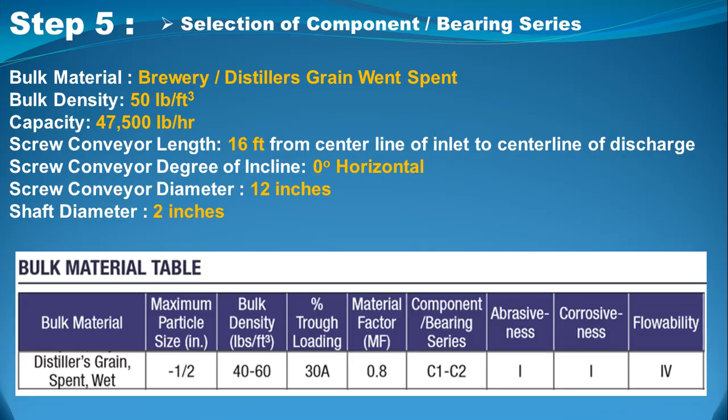Moving on to step 5.1, selection of component series: screw, trough, and cover. The recommended component series for brewery, distillers, grain, Went Spent is series C as listed in the bulk material table, because these materials are dense, abrasive, and sluggish when compared to series A and B bulk materials.

Series C belongs to the heavy duty construction category. This is to prevent excessive maintenance or downtime, and also consists of heavy duty screws, troughs, and covers. Sectional screws and formed flange troughs are recommended for series C bulk materials. You can see this on page 18 of the engineering guide.

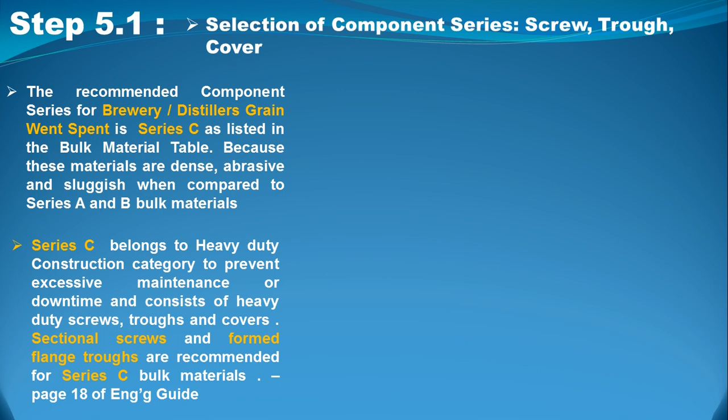Based on the type of bulk material, the type of series we select for the sectional screws and form troughs, flange troughs, is series C. Since we already have the screw diameter, which is 12 inches, the length of the screw conveyor is 16 feet. This design is constructed with carbon steel, as we considered in the second video on steps 3 and 4.

Based on the component series table, since we have the screw diameter of 12 inches and shaft diameter of 2 inches, the cover thickness is 14 gauge. For the series C type of screw conveyor, based on this, we have a sectional screw number, and the standard is 12S416. This is the code of the screw conveyor, sectional, since we considered sectional screw because the series of our design is series C.

The trough thickness minimum is 3/16 of an inch. As you can see on the highlighted red data, those are the data that are selected for this type of design of screw conveyor.

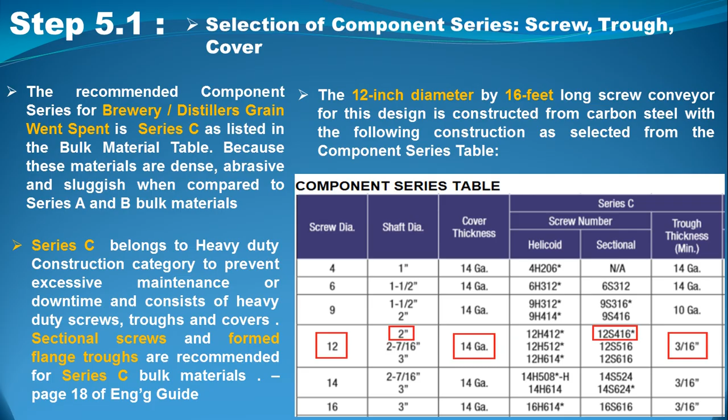Step 5.2 is the selection of component series, the screw. As we can see from the previous data, here is the sectional screw and flighting data, based on the series C that we consider.

Since we have already the screw diameter of 12 inch and the pitch is 12 inch, because we considered in the previous video, step 1 to step 3, standard pitch - the pitch diameter and the screw diameter are equal.

Based on this data, the standard pitch single flight screws have the outside diameter equal to the pitch, and the most common screw type used is for horizontal screw conveyors with inclines up to 10 degrees. Since our design needs a horizontal screw conveyor, the design is safe, and the considered standard pitch and diameter is safe.

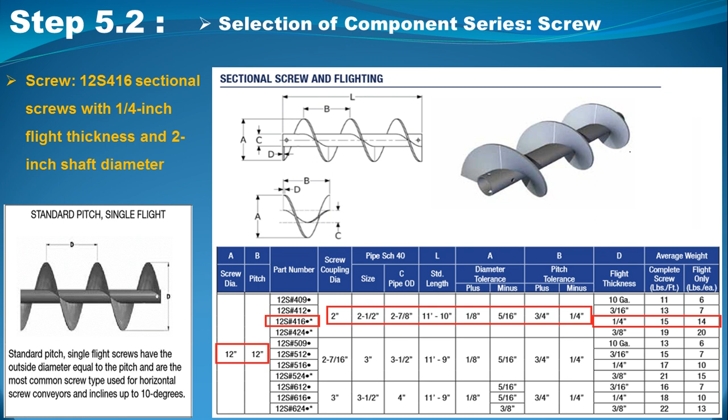Step 5.3 is selection of component series, Trough. Since the screw diameter is 12 inches, the trough thickness is 3/16, as in the previous slides. We have dimension A at 13 inches, dimension B at 7 3/4 inches, and dimension C based on the drawing at 2 inches.

So this design we consider is the U-Trough, the TUF 12316 formed flange trough with 3/16 inch trough thickness. The TUF 12316 is the standard, with a weight per foot in pounds of 29.

This part number is in this form. So when you design, fabricate, or purchase, you specify the part number, because during fabrication it uses the standard design and dimensions. This data will be considered, as you can see on the table.

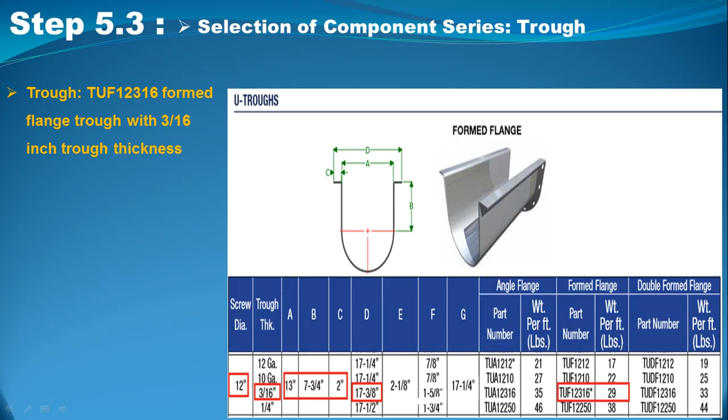So step 5.4, the selection of component series, the cover. Still same, based on the screw diameter, so 12 inches. As you remember previously, the thickness of the cover is 14 gauge. So this is the flange. For the cover, we consider the flange cover with 14 gauge thick cover thickness.

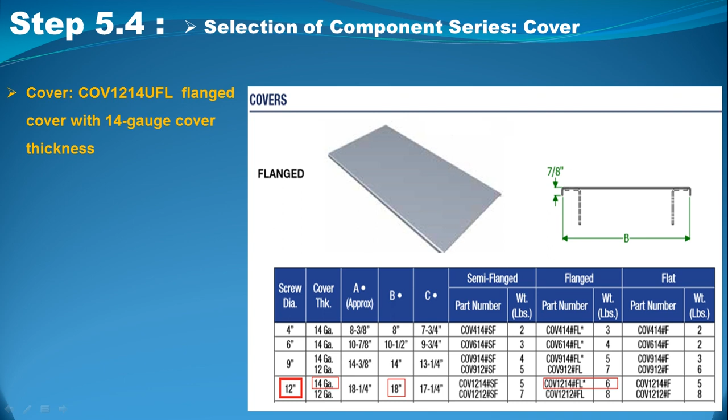The flange part number on this design is COV1214#FL flange cover. So this is the form. During the fabrication or design, or you may order the finished one, so you may specify the part number. But if you do the fabrication in-house, so based on the drawing and also on the dimensions, as you can see, these are highlighted with red color boxes.

Step 5.5 is the selection of hanger bearing series. The recommended bearing materials are 1 and 2 as listed in the bulk material table, which is C1 and C2. So the series component is C, and the bearing material series is 1 and 2. We already selected before, no? Based on the bearing material series 1, 2, the hanger bearings can be Nylatron, Plastech, UHMW, wood, Gatke, or ball bearing.

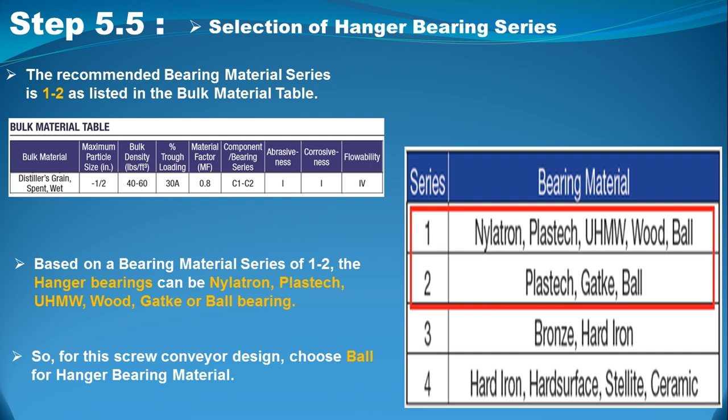So based on the previous video, we consider the ball bearing. Series 2, it's ball. So the bearing material is ball. For this screw conveyor design, we choose the ball for hanger bearing material.

Step 5.5, selection of hanger bearing series. Based on the shaft diameter of 2 inches, we get this standard bearing. As you can see on the drawing, A is the width or thickness, 1 and 15/16, almost 2 inches. And B is 3 and 1/4, 4 and 5/8 is C.

So C is the diameter, the outside diameter of the flange bearing, hanger bearing. So the part number is HGBB2. The considered hanger bearing series is the style B hanger bearing, selected and used for the U-Trough hanger or 670 U-Trough hanger. Since the trough of the screw conveyor is U-Trough, this is the type of bearing we consider.

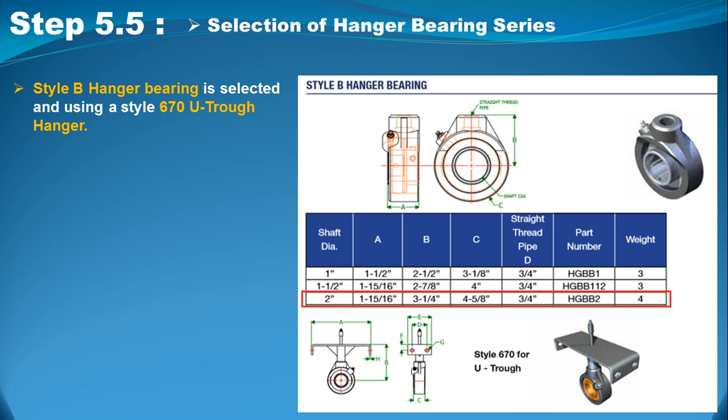Step 5.6 is the selection of drive-end bearing series. For this design, we consider the flange roller bearing, selected for the drive-end mounting of the screw conveyor. Flange roller bearings are mounted directly to standard trough ends on the drive end of the screw conveyor. Flange bearing housing also contains 2 sets of tapered bearings designed to withstand the thrust of the bulk material being conveyed.

Since the shaft diameter is 2 inches, based on the picture, this is the dimension of the flange bearing. So the standard part number is EBF2R. This is the part number of the flange roller bearing type.

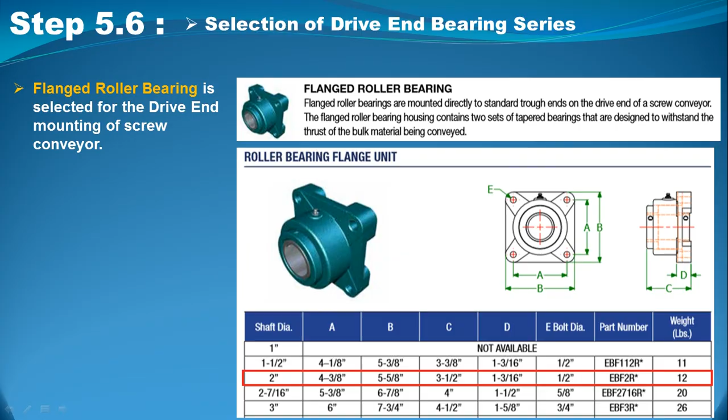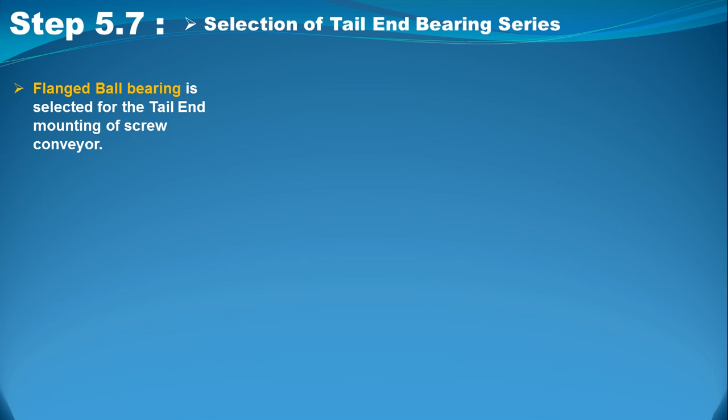Step 5.7 is the selection of tail-end bearing series. We choose the flange ball bearing as selected for the tail end mounting of the screw conveyor. Flange bearings are mounted directly to standard trough ends on the tail end of a screw conveyor. The ball bearing housing contains one set of ball bearings designed to withstand radial loads only.

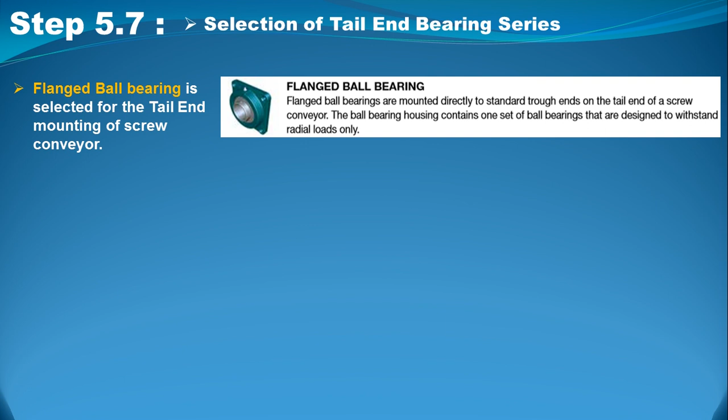Tail end loading is not as complicated unlike on the drive side. So for 2 inches shaft diameter, we got the part number EBF2BB, type of ball bearing flange unit. For the dimensions of each, as you can see on the drawing, you can refer to the chart.